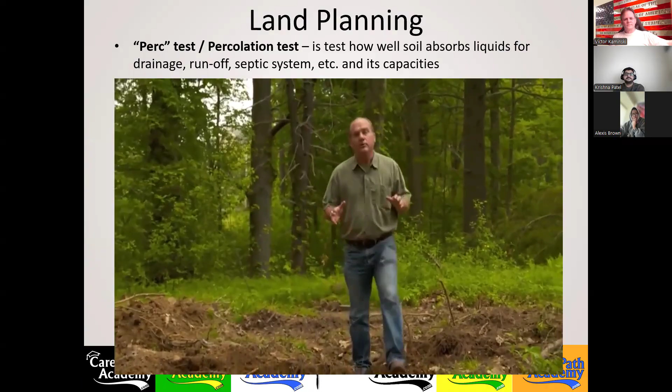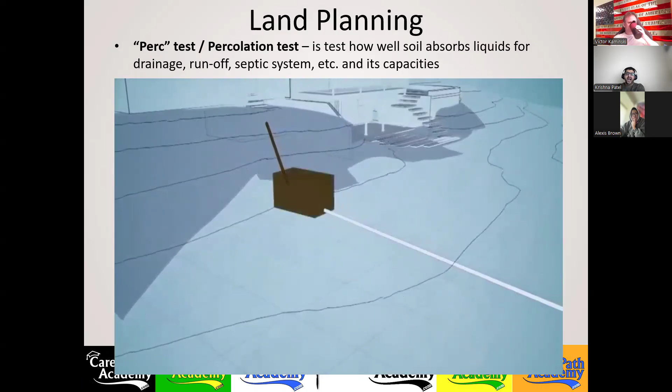There are a couple of key components to a septic system. One is a septic tank. This tank will accept waste and water. The solids stay in the tank and are broken down over time by bacteria. But the water that passes through the tank will go out through a leach field. A leach field is a series of perforated pipes that sit below the substrate of the soil, and the water will trickle or drip down through the ground.

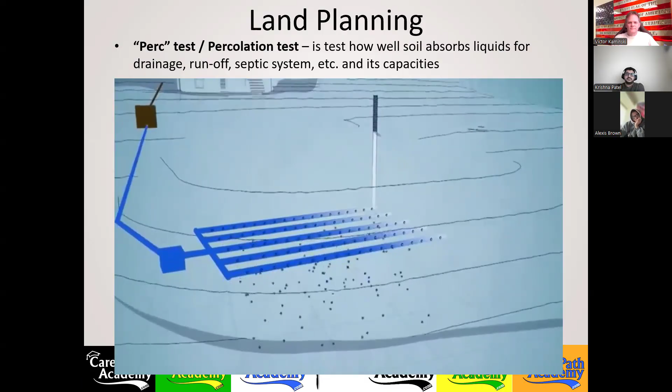Now, to determine if you can even have a septic system, it starts with a perc test. Brendan Zabricki is with the town of Essex. You've had your share of perk tests, right? I sure have. So what's a perc test? That stands for a percolation test.

It's a field test to simulate how wastewater will travel down through the soil once a septic system is built on top of it - how fast it'll pass through, sort of like water going down through the coffee grounds in a filter. That's a good analogy, yes.

So what have you done to get us to this point? Previous to this, we dug several deep holes, about 10 feet down into the ground. That allowed us to get a look at the various soil layers that you're going to find whenever you dig here in New England.

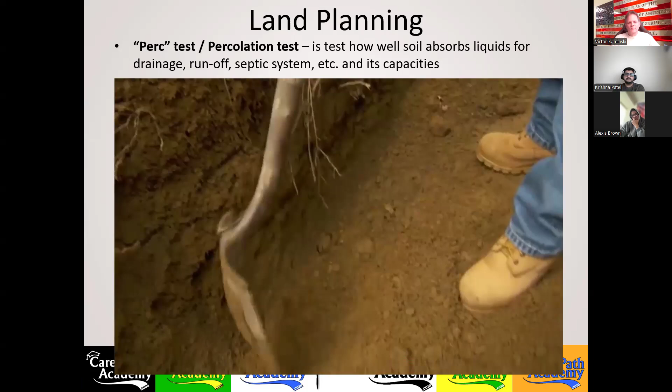So this is topsoil. What are you seeing? As you just mentioned, this is your topsoil. Then you go through a layer known as subsoil. You then finally get down to a layer that is really the glacial material - the glacier brought it in. We have determined that this is the most restrictive or most limiting layer in the soil profile.

And the septic system code requires that we actually perform the perc test in that most limiting layer. So you're testing at almost the worst place. The worst place that you're going to have underneath that system. That's correct. So that looks pretty dense right here.

So it doesn't accept water too well. That's exactly right. So what we did after that is, knowing what we had in the deep holes, we just had the machine dig down a shelf to the top of that most restrictive layer. And we're ready to dig a perc hole that's about 12 inches in diameter and about 18 inches deep.

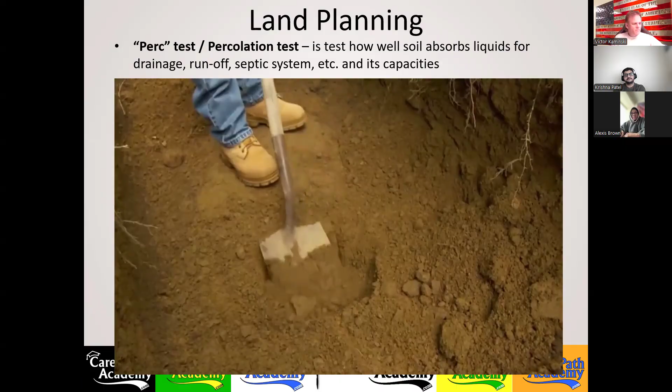Then we're going to fill that hole with water and let it sit for a little while to make it saturated. That will be a great simulation of how soil will behave when it's wet underneath the leach facility. Then we will use a ruler to watch the rate at which the water drops down through the hole over time. That will give us what's called a perc rate, or percolation.

So what happens if the rate doesn't drop fast enough? If it doesn't drop fast enough, that would be a limitation to the site - you may not be able to build a septic system in this particular location. Important test then. It is very important.

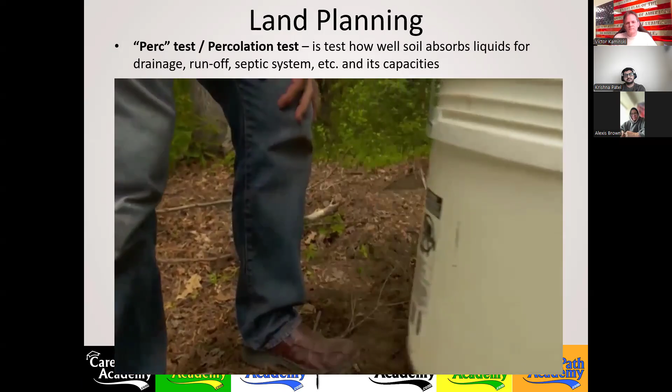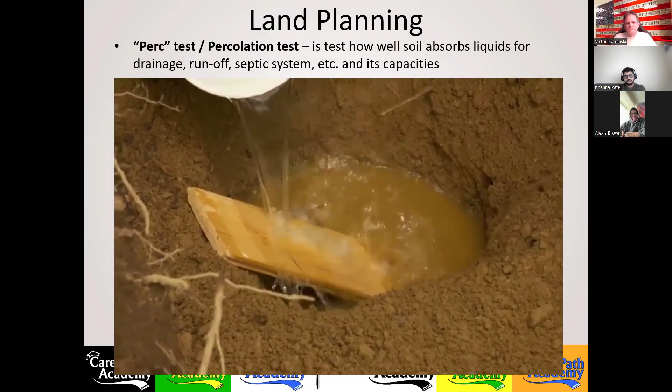Okay, so we'll check that. We're about 9 so far, so we're going to need another bucket of water.

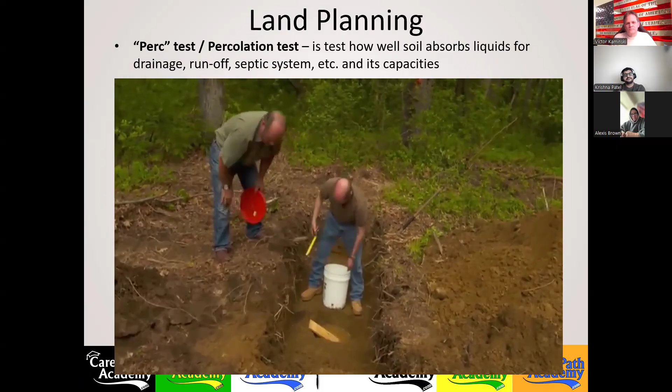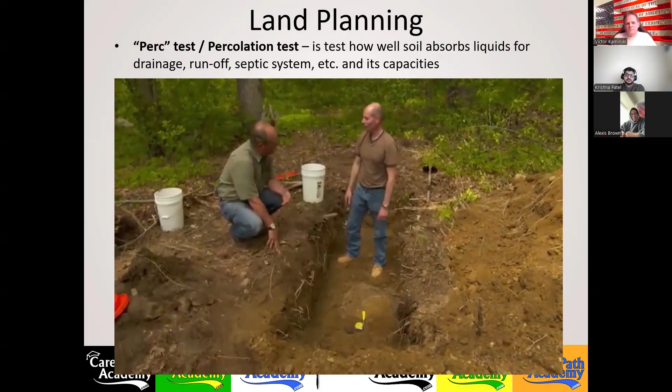All right, Brendan, it has been 15 minutes. We want to see the time it takes to go from 9 inches down to 6 inches. It dropped down to 6 inches in about 27 minutes. So is that good? I've seen quicker than that, but it's somewhere right in the middle. But you're telling us that we passed the test, right? Yes, absolutely.

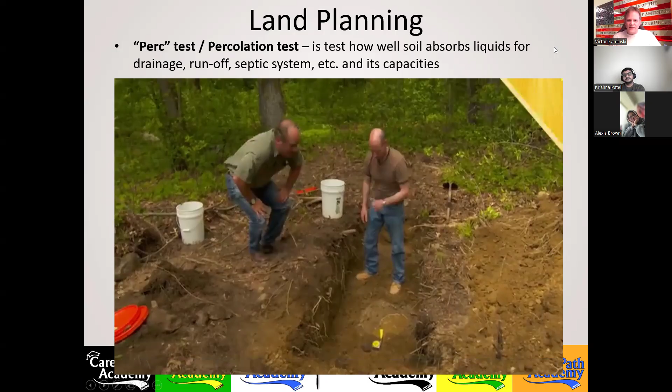So it's something as rudimentary as that in order to do a perc test to see if you could put in a septic system - just to see how well the ground absorbs the water at its most restrictive layer. That's basically what a perc test is. Because some of these communities may not be located anywhere near city services that you could tie into, this is how they do a percolation test for those that need septic systems.

Okay, so subdividing land - the subdivider seeks out raw land that they could profitably subdivide.

They determine if the proposed use is consistent with zoning, locate financial backers, and initiate their marketing strategies. So they do a lot of stuff before they even buy the property, because when they put an offer in on the property they want to develop, they make that offer subject to contingencies.

Them being able to get all the permits, all the zoning, the testing that they do would allow for the development to be built. So they put a lot of subject-to clauses, a lot of contingencies in their purchase contracts when they're buying land to subdivide like this.

Then title to the individual parcels is transferred as lots are sold, using a blanket mortgage that has that partial release clause, if you recall, which allows them to sell a smaller lot off of a larger one without having to pay back the entire loan in one shot. They just pay back a portion as the smaller lots are sold off of the larger one.

Impact fees are paid to the municipality by the developer to help the community cope with the added demand on city services from that development. There's an additional tax depending on the size of the subdivision, taxing for the use of police, fire, schools, garbage, public works, water, sewage demands, etc. I refer to them as the legal bribes, since they need to be negotiated and paid to the municipality to get approvals for certain projects.

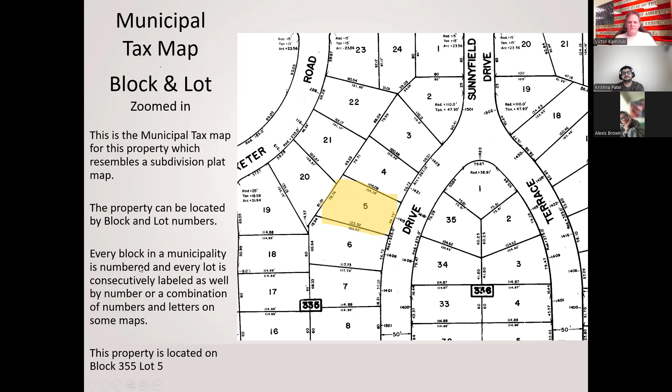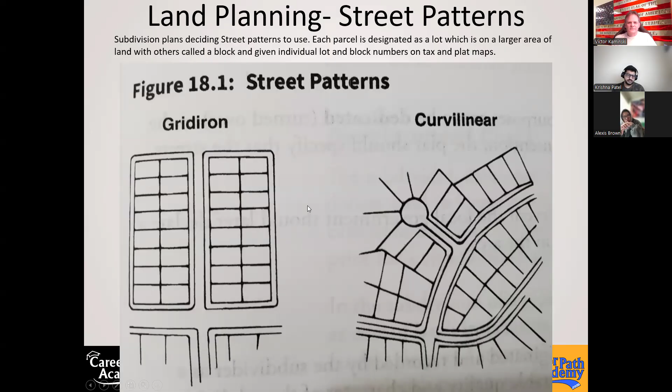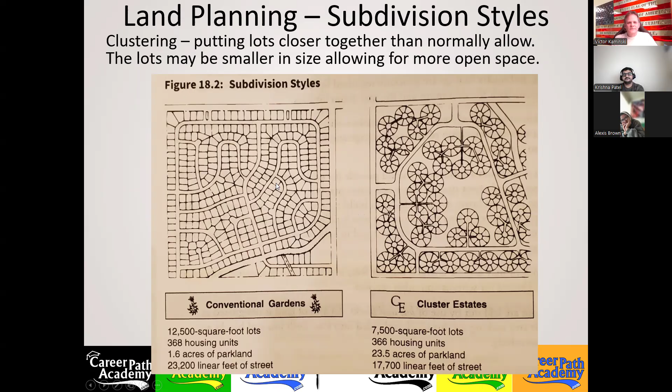Now is that street going to remain private, or are they going to dedicate it? That means they're going to give it to the municipality. Well, that should be written somewhere on the subdivision map when they submit the plans for approval.

A plat is a map of a subdivision indicating the location and boundaries of each of the individual properties. It's also considered a legal description of land, which we'll go over in Chapter 19. So let's highlight: a plat of a subdivision is a map of the development indicating the location and boundaries of the individual property. That's exactly what it does, because you locate the property by lot and block number, and then you can see the boundary lines, the width and length of the property, and you can see the outlines.

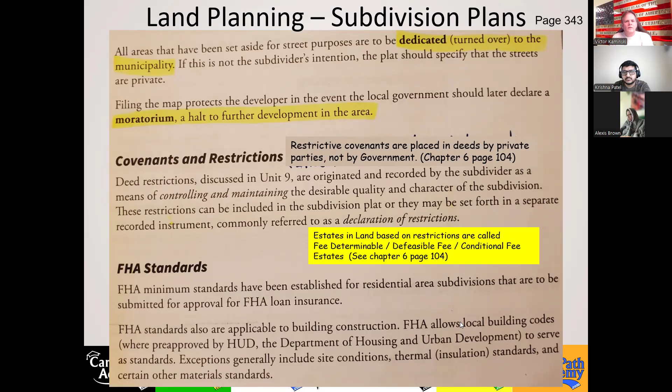Got it. Right. You got it too, Alexis? Got it. All right.

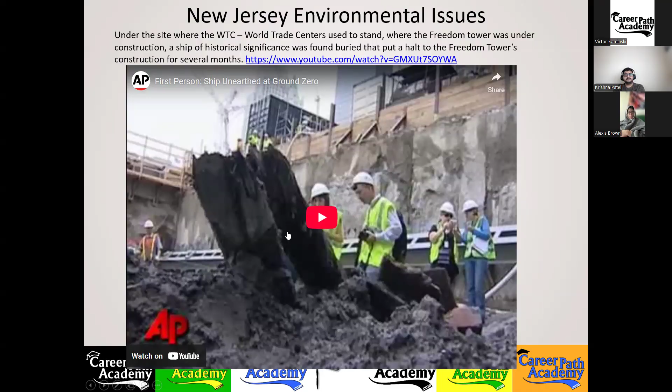Sorry, I muted the volume on here for a second. Let me get that back up there, but there's a commercial. More savings. There we go.

Can't hear it, I can't hear it. Yeah, the whole block was filled in. What's the matter, you can't hear it? No, we can't hear it. It sounds real low. Really? Okay, let me optimize the video here, that's weird. I got it.

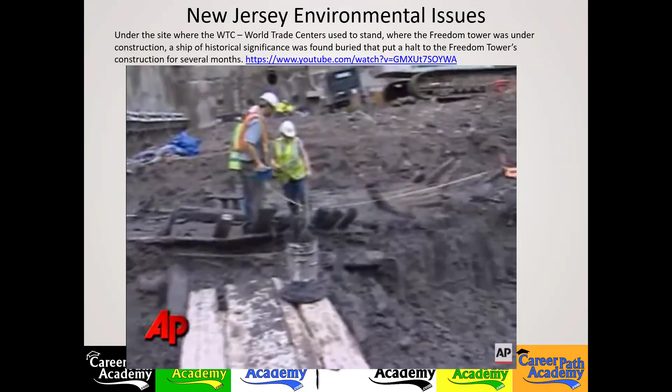At this point, we really don't know much, so we have to continue our analysis, see what's under the boat, what's in the dirt around it, and see if that can tell us anything.

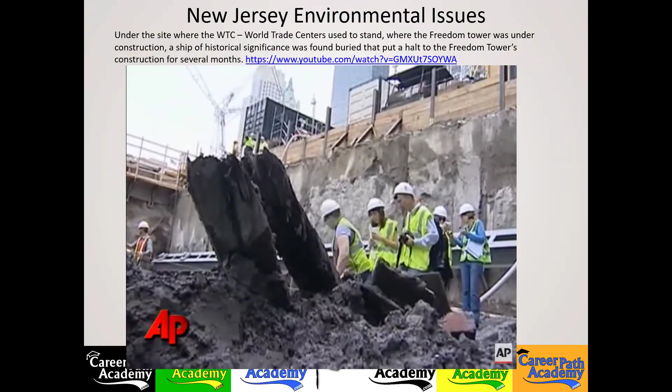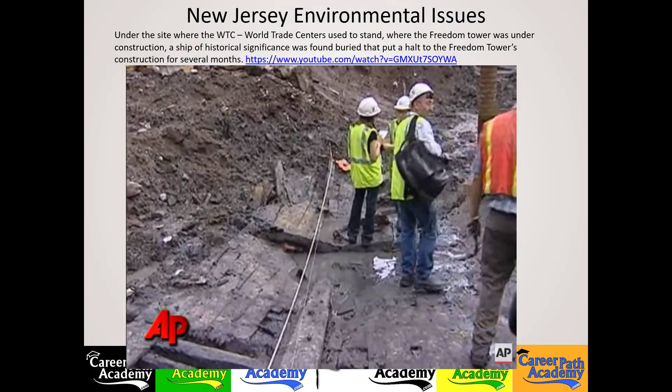We're assuming it was placed here in the early 1800s based on historic maps showing how the shoreline progressed. They would sink ships little by little and gradually extend the shoreline, building new wharves and piers out into the river, leaving a slip in between so boats could continue to sail in and out. As waterfront land became more valuable and necessary, they would continue filling in and extending the shoreline gradually, tied into commerce and trade of the early 19th century.

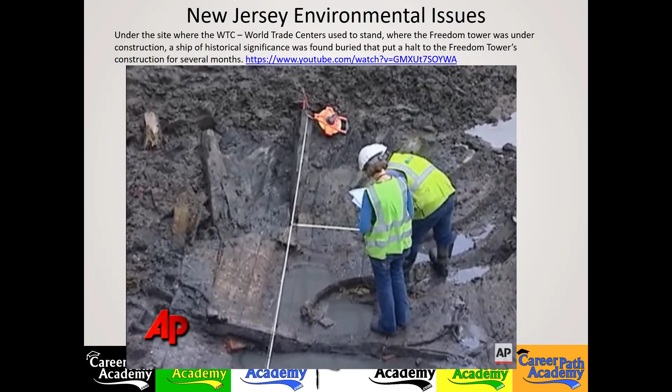There have been ships found in the city before, including a famous one on Water Street found in the early 1980s. It's the kind of thing everyone always hopes to find. It's an exciting, big find, something interesting that gives us a lot of information. It's a very unique part of history we wouldn't have access to otherwise.

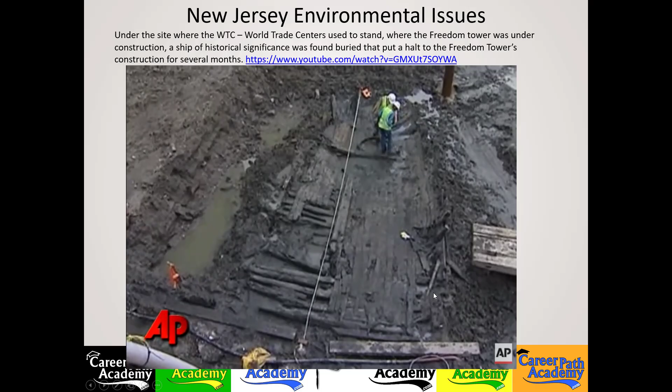That definitely put a hamper on the project there. When you find something of historical significance, even with the urgency of building the Freedom Tower after the World Trade Center, it hampered that project and delayed it. You could see construction workers working around them in different areas, but not in that particular area where they found the ship.

It turns out New York City is on a peninsula, and that peninsula was built up over the years. New York City used to be very narrow, and where the World Trade Centers were, that all used to be water. They actually built the land up from there all the way out.

That's pretty far inland these days, where the Freedom Tower is sitting. Just imagine blocks and blocks after that, where you've got these skyscrapers standing, that all used to be water. That's all man-made land right there.

So they found that old ship that was sunk there to try to build up the land. If you look up the documentary on that, the History Channel or Discovery Channel websites, you can find videos on YouTube about it. Just look up World Trade Center or Freedom Tower and the ship that they found.

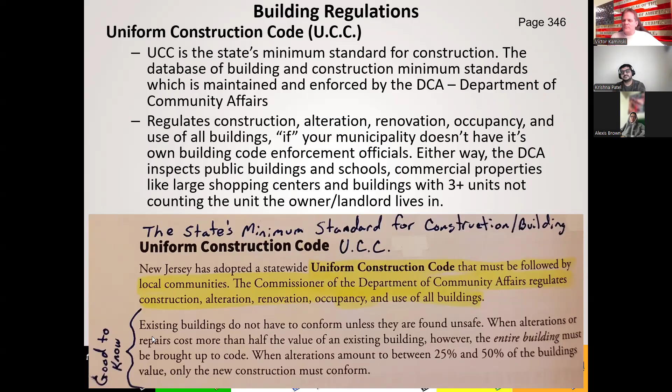It's only when the construction exceeds 50% of the value of the building or property that the entire building would then need to be brought up to code. I've had to inform several clients about this in the past.

Now, all new construction in the state of New Jersey comes with a 10-year builder's warranty. It's required by law, called the New Home Warranty Builders Registration Act. It requires that all builders of new homes register a warranty against new home defects for up to 10 years. They purchase that warranty and register it through the DCA in Trenton, which has a record of all these warranties from all new construction done by builders.

Now, it is a 10-year warranty, even though it says up to 10 years. It's just that the warranty only covers certain things. The first 3 years, everything is covered. After that, it may not cover the HVAC system anymore, but structural integrity and other things are still covered. So it covers different things for different periods of time, up to the maximum of that 10-year warranty.

Now, for enforcement: if there are no local building code enforcement inspectors in your municipality, state inspectors from the DCA come down to inspect. Construction permits must be issued before any construction, alteration, demolition, or change of use or occupancy of a building can be undertaken.

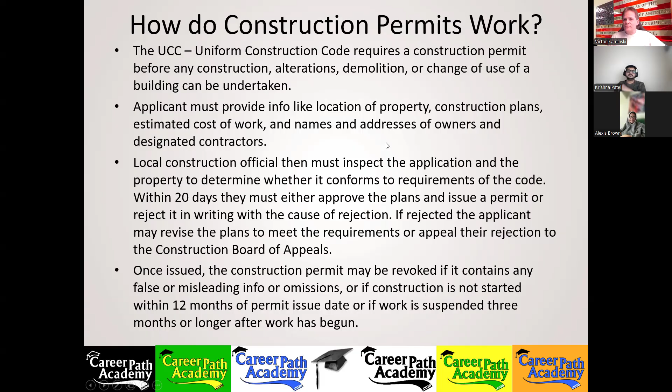So here's where I got all this from. But let's just...

Task of administrating and enforcing the code. They're talking about the building codes. And the Uniform Construction Code requires a construction permit to be issued by each county or municipality before any construction, alteration, demolition, or change of use of a building can be undertaken.

So that's all I have you highlight there. All right, now...

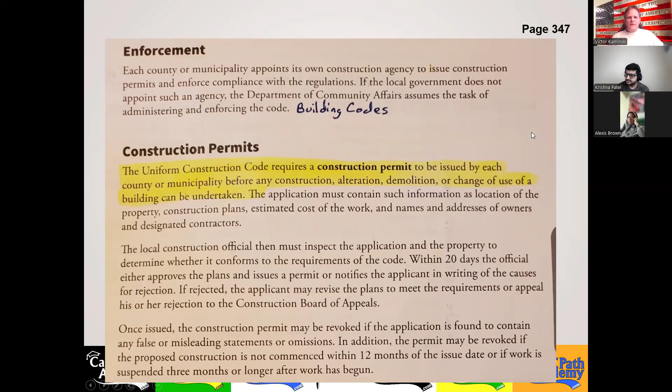Before anybody can occupy a structure after it's been constructed, you got to get an inspection to show that it is fit for human habitation and there's no condition that causes a threat to the health or safety of any of the occupants. With new construction, it is always called a CO, the certificate of occupancy.

Now, as far as existing structures that get work, or just simply don't have work but have a transfer of ownership, it may have different names depending on the municipality. Some municipalities just call all these permits a CO. Others that are little sticklers may have different names, like a COC for Certificate of Compliance.

That's for work done on existing structures, not new construction. Or a CCO, that's a Continued Certificate of Occupancy. That's for any time we change the use, change of use or ownership. You sell the property, you got to get a CCO. No work was done to it, we're just transferring ownership, so we got to get a CCO.

Now, like I said, many municipalities don't deal with these different names, they just call them all a certificate of occupancy. But some do go by the different naming convention: CO for new construction, COC for existing properties that had work done, and a CCO when there's just a simple transfer of ownership.

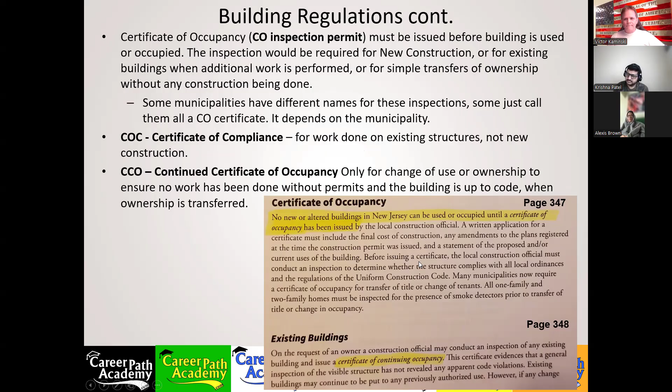So smoke detectors have to be on each level of a building and within 10 feet of any sleeping quarters. Carbon monoxide detectors with 10-year sealed non-replaceable batteries must be installed as of the 2019 update to the law. Homes built after 1978 require hardwired detectors.

Most municipalities require one on each level, as well as hardwired with battery backups. They like that battery backup because sometimes if there's a fire in a house, it can melt the wires and then the alarm doesn't work. So a lot of fire inspectors want them to have those battery backup detectors.

Because you get some people that are insistent, well, I got mine connected to an alarm service that they monitor. Okay, well, what good is that going to do you if the wires melt? There's no communication, it doesn't work anymore, but the batteries at least keep going on it.

All right, now fire extinguishers must be mounted in the kitchen or within 10 feet of it using the hardware they came with, and they must be rated to put out ABC type fires and must be under 10 pounds. Well, guess what? That's no longer the case because our governor, who is exiting the state right now, decided that he was going to change that law for some reason this month or last month.

So, what is that? As of, I'm going to say 3/20/25...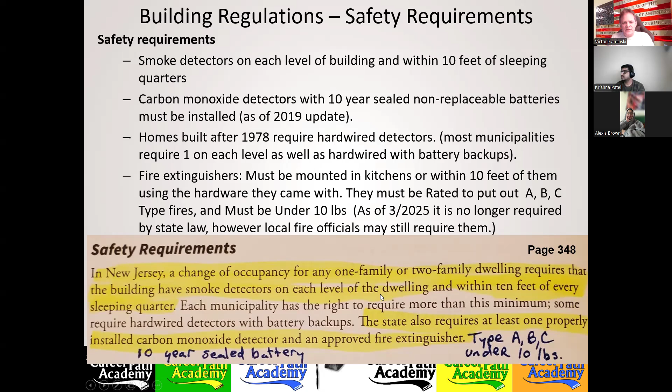It's not a state requirement, but it may still be a local requirement, so I would still look for them. I would still advise people to put them in there, but it's not a requirement. You'd have to check with each municipality to see if it's their requirement. Okay, that's right.

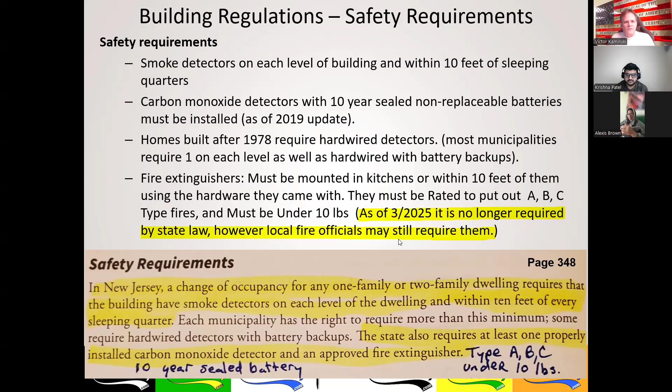All right, so that went into law in 2005, that requirement for the fire extinguishers, when acting Governor Richard Codey was visiting with some fifth graders and discussing fire safety after all these rash of fires that we had. A fifth grader suggested to the governor of the state of New Jersey, why don't they just require fire extinguishers in the kitchen? And he was like, wow, what a good idea. And then he made it a law on the suggestion of a fifth grader.

Interesting, huh? So for the ABC ratings: A is to put out trash, wood, and paper fires. B is to put out liquid gases and solvents. And C is rated to put out electrical fires.

All right, now we also have the Hotel, Motel, Multiple Dwelling Health and Safety Law. This was enacted to ensure that residents in the state of New Jersey have decent standards and safe units of dwelling space. So a state inspection is often required, which we refer to as a green card inspection in the industry. This is our industry lingo here. We call it a green card inspection because it used to be that when you passed the inspection, they gave you a certificate and it was green in color.